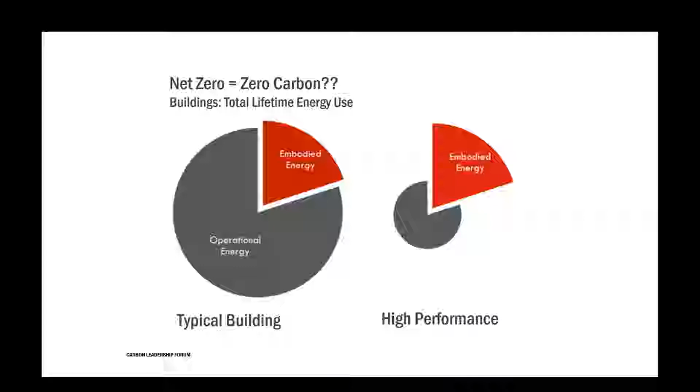Notably, if we're trying to meet this 2050 target, it's the emissions that happen now that are guaranteed to happen. So if we focus on reducing material emission impacts, we're making a guaranteed reduction in the immediate time frame.

In order to understand the environmental impact of material manufacturing and production, environmental life cycle assessment is used. This, sometimes called carbon accounting, tracks the quantities of material and energy consumed through the manufacturing, use, and end of life of a product or process.

So we are taking things from Earth, such as clean water or limestone, and then we are emitting things such as polluted water and greenhouse gases, or methane or nitrogen. So life cycle assessment is really an accounting method similar to cash accounting, but instead of tracking dollars, we're tracking emissions.

Much of material production is highly energy intensive, so the emissions can come from burning of natural gas or consuming of electricity for steel production, but it also can come from driving a diesel truck or a chemical reaction that takes place during cement production. So there is a wide range of emissions that happen throughout material manufacturing, and life cycle assessment is tracking those emissions.

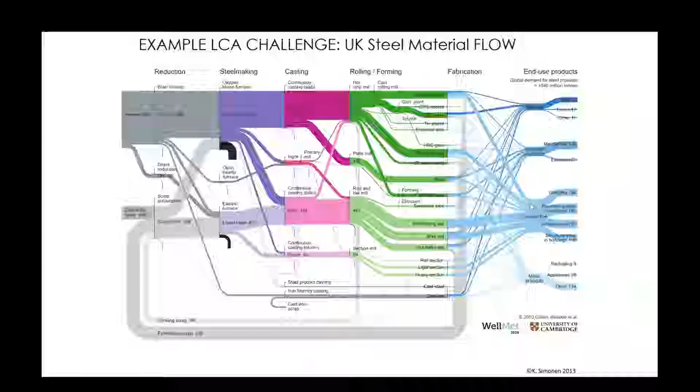As I mentioned, life cycle assessment follows a standardized method of tracking and reporting the environmental impact of a product. You can use that, for example, to find the carbon impact of producing flooring or the carbon impact of building a building.

And you could track that from cradle to gate, so from material extraction through manufacturing, or you can do it all the way from cradle to grave, so all the way till its disposal, or you could track it cradle to cradle, where we look to recycle and reuse and make the end of life product a material input to new products.

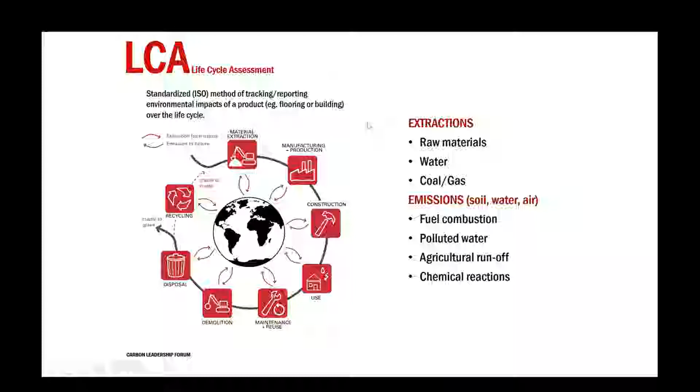Our work is focused particularly on the immediacy and global challenge of reducing carbon emissions. Life cycle assessment tracks other environmental impacts as well. These include eutrophication, or increasing nutrients to water bodies that can result in algae formations and killing off of a waterway, acidification of both water and soil, ozone formation or smog, and ozone depletion, which is the ozone hole.

Life cycle assessment tracks environmental impacts that are able to be measured well and correlated to emissions. Things not tracked by life cycle assessment include habitat disruption, the changing impacts of transforming land from a forest to subdivisions, for example. So it is not the only way of measuring environmental impact, but it is a way of measuring large-scale, broadly understood environmental impacts.

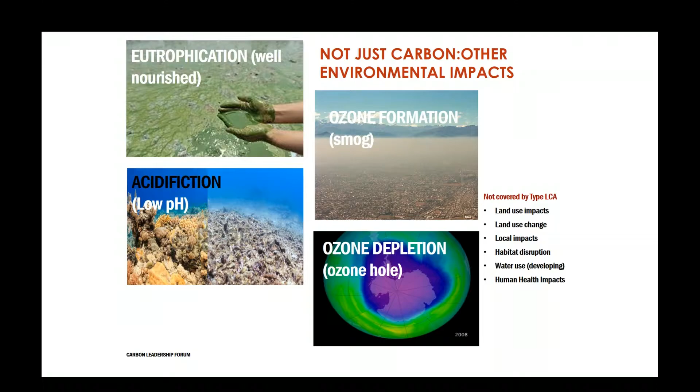Notably, the global efforts to track and reduce ozone depletion have been quite successful, with global collaboration enabling sort of turning the corner and healing the ozone hole. So through global cooperation about tracking and reducing ozone depletion emissions, we have made success there.

In the use of life cycle assessment data, the building industry usually does this in a fairly simplified manner, in which we're looking to track the quantities of a material used, for example, kilograms, and the estimate of the environmental impact of that steel production to get a total estimate.

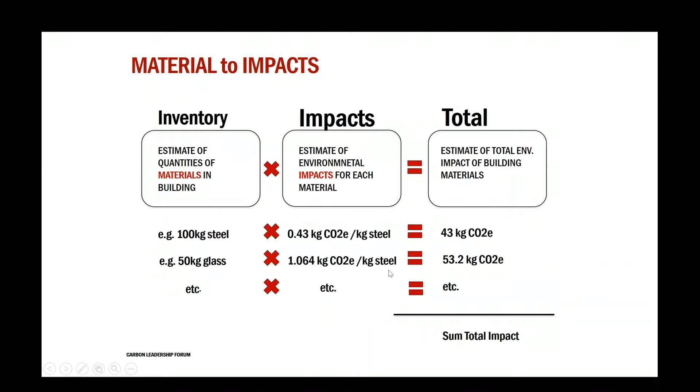So there are databases of environmental impacts of different building materials. There are also building materials that report their environmental impacts in a label, sort of like a nutrition label, called an environmental product declaration. So there's data around the environmental impacts of material, and we can understand the total impact of a building by multiplying it by the quantities of materials that are used.

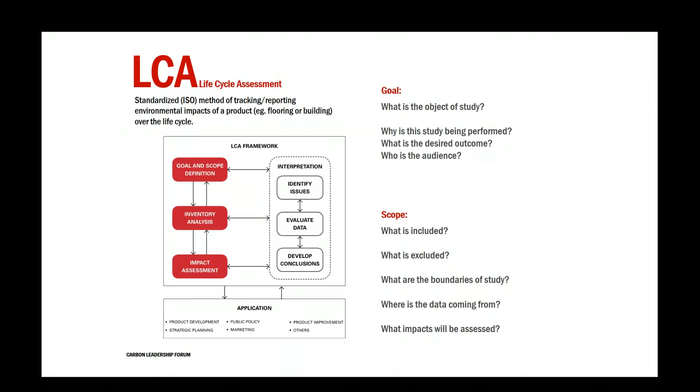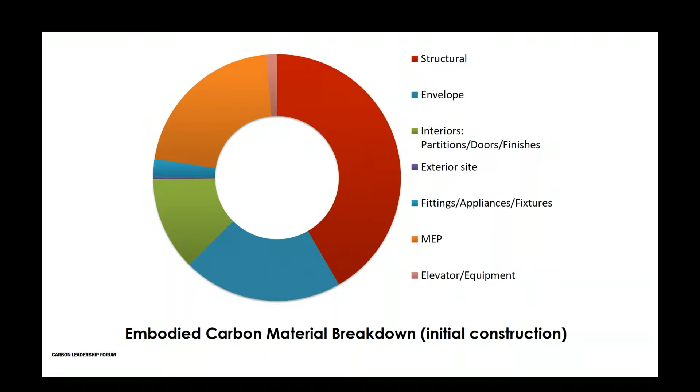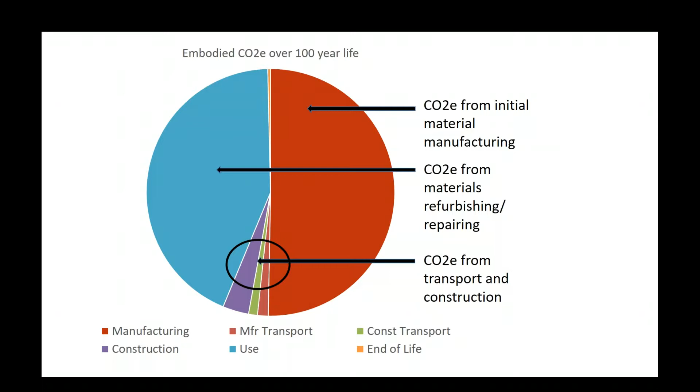There are multiple drivers within the building industry pushing to use life cycle assessment. Probably the most impactful has been LEED version 4, which gives points for reporting materials that have reported their life cycle impact with an environmental product declaration, and also gives points for demonstrating improvement using a whole building life cycle assessment.

Architecture 2030, a nonprofit, has issued a challenge for products, pushing product manufacturers to develop low carbon building products. This fits with a broader push within the building industry to increase transparency and understanding of the materials we're using, including health product declarations, declare labeling, and other certifications to confirm that sourcing of materials is done responsibly.

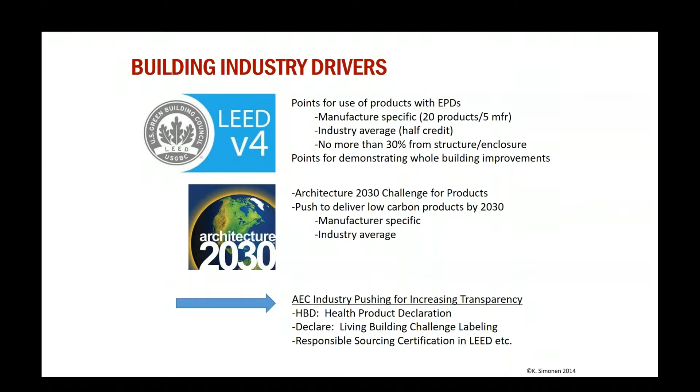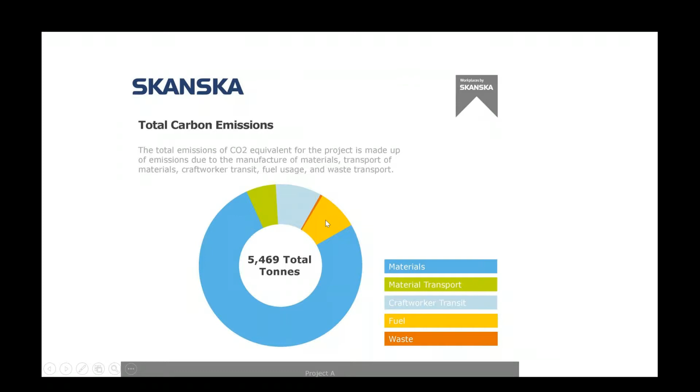I'll give a couple of examples of applying life cycle assessment in practice. The first is from Skanska Construction, which has been using life cycle assessment to evaluate the carbon emissions of different products and track the impacts of materials, material transportation, and craft worker transportation—looking at how much their employees are traveling and the fuel used on projects. They've developed a method to track different projects and understand where the opportunities for improvement are from a material and transportation perspective.

We did a research project here at the University of Washington trying to understand the order of magnitude of carbon impacts of construction. We compiled a database of multiple life cycle assessment studies of buildings and identified that buildings typically have less than about 1,000 kilograms of carbon dioxide equivalent per square meter, commonly between 200 and 500.

We are really at the beginning of using environmental life cycle assessment to track and reduce building material impacts. This is very similar to where we were about 10 years ago related to operational energy. We're hoping to help move the industry to understand high carbon versus low carbon building methods, and encourage movement toward the lower carbon ones.

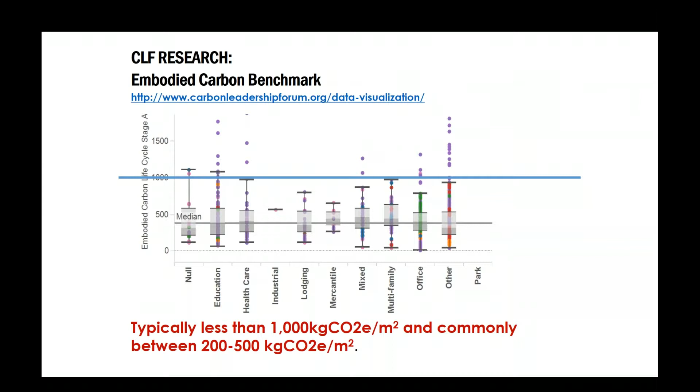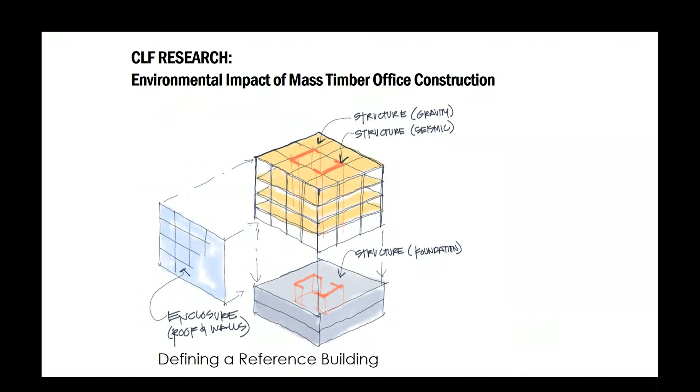This is a project that was funded by the U.S. Department of Agriculture to understand the environmental impact of the use of mass timber or heavy wood construction and taller office building construction. We built a life cycle assessment model of the structural system, the enclosure, the roof and the walls, and the structure of the foundation. Then we ran a parametric model, changing the column and grid beam spacing, testing out what are the optimum structural configurations for these buildings.

What we found is that the volume of the beam and slab, in cubic foot per square foot, can range by almost a factor of 2 depending on how you configure the building. So if we're looking to reduce the environmental impact of buildings, we're looking to both reduce the quantities of material we use and then reduce the environmental impact of those materials. This study was looking at trying to optimize the amount of material that is used.

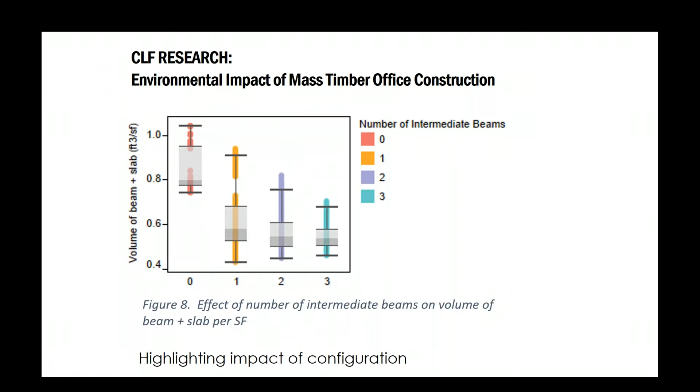Just this spring, we published an LCA practice guide. This is an introductory guide for life cycle assessment designed for building industry professionals. It has a general introduction, relatively short, that goes into a little bit more depth than what I talked about here. And then it has an implementation guide breaking down the process into 5 key steps, as well as providing online resources, links to tools, and other examples. It really is an entry-level document trying to understand how do buildings impact the environment, what are those emissions and how do they matter, et cetera.

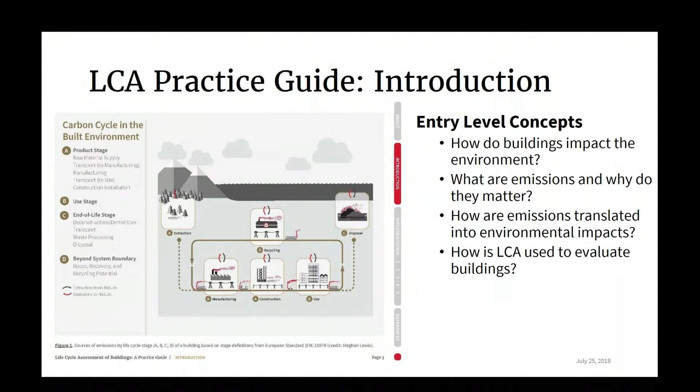So this is a fairly quick introduction to the use of life cycle assessments to understand the carbon impact of building materials. Again, I encourage you to visit our website, which has additional resources, or consider joining the Embodied Carbon Network. We are a global group of practitioners. It's an online discussion forum, so you can go there and ask questions and get answers, or just see what other people are talking about around this topic. Thank you very much.

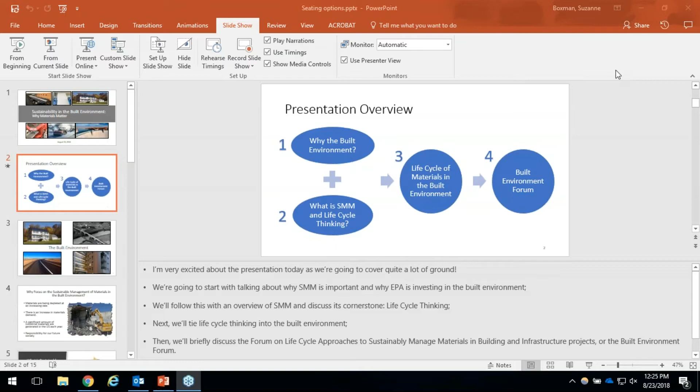Thank you, Kate, so much for your presentation on the Carbon Leadership Forum. As Kate explained in her presentation about life cycle assessment and the Carbon Leadership Forum, we recognize there's a critical need for life cycle thinking in the built environment. Life cycle assessments and life cycle thinking are key principles of our sustainable materials management program. So today, I'm going to introduce our Sustainable Materials Management, or SMM, program in the built environment, discuss some key life cycle thinking concepts, and conclude by describing the outcomes of a forum we had earlier this year, where we talked about life cycle approaches to sustainably manage materials in buildings and infrastructure projects.

For an overview of what I'm going to talk about: we'll start with why SMM is important and why EPA is investing in this area. We'll follow this with an overview of SMM and discuss its cornerstone of life cycle thinking. Then we'll tie these two concepts together, life cycle thinking and the built environment. Finally, I'll talk about our forum on life cycle approaches to sustainably manage materials in building and infrastructure projects, which I'll refer to as the Built Environment Forum for brevity. Then it sounds like I'll have time to answer a couple of questions.

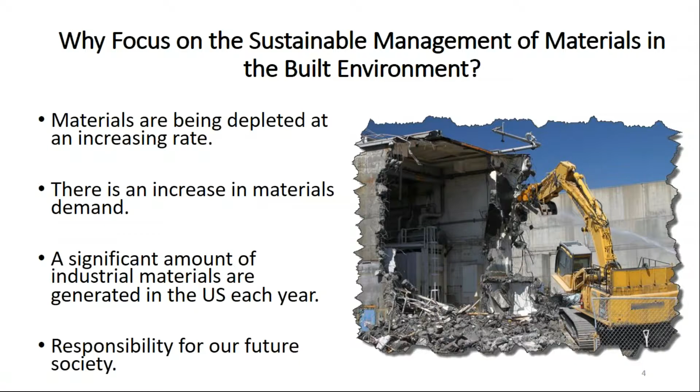Many opportunities exist for increasing the safe use of these resources. We have over 500 million tons of industrial materials generated in the U.S. We have 110 million residences in the U.S. We have natural disasters that are increasing the amount of debris generated, and really all of these present a lot of good opportunities. Because of all these different opportunities, we really need to come together to track and assess trends in the built environment. We each play a role in creating our future, and by coming together to work towards a better one, we'll be able to devise strategies for reducing the use of our raw materials, find efficiencies in our practices, and improve our bottom line.

With all of that line of thinking, that's where our sustainable materials management program comes in. Achieving all of the different growth that we need to do is just not possible with our current practices. There are different strategies for conserving natural resources, all informed by this concept of using natural resources in a sustainable manner while minimizing impacts on the environment and human health.

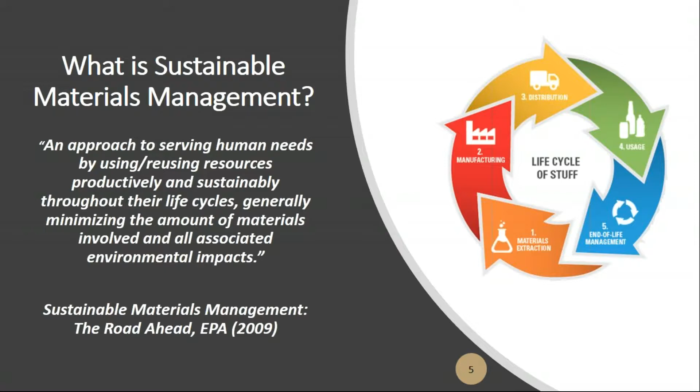There are a variety of different tools and approaches that engage life cycle thinking. We have life cycle assessment, or life cycle analysis, commonly referred to as LCA. This is a technique to make more informed decisions through a better understanding of human health and environmental impacts of products, processes, and activities. LCA can include evaluations of air, water, land, and energy of products, processes, or possible alternatives. You can think of it as an environmental footprint for a building or a material.

But this is really just one approach, and it can be pretty complex. It requires you to look at the bounds of your assessment and really take meticulous, detailed accounting of all the materials involved in that product or process. So EPA is actually working on an open source LCA tool to help bring everyone into the space. We're hoping in the near future a tool like this can help organizations understand where the biggest impacts are in their own value chain, and how to be better stewards of the resources and make the most effective use of those resources.

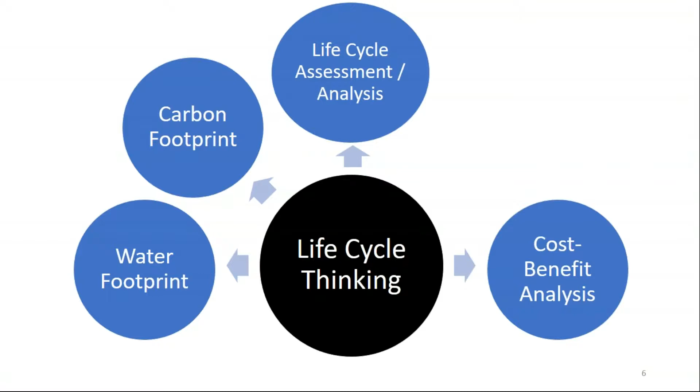And then there are some other tools. Cost benefit analysis, using that to make better decisions. We also have environmental product declarations, which can provide quantifiable environmental data to compare across products that fulfill a specific and similar function. But really, when all of these tools are used together, or used in contexts where they fit best, they can support sustainable materials management.

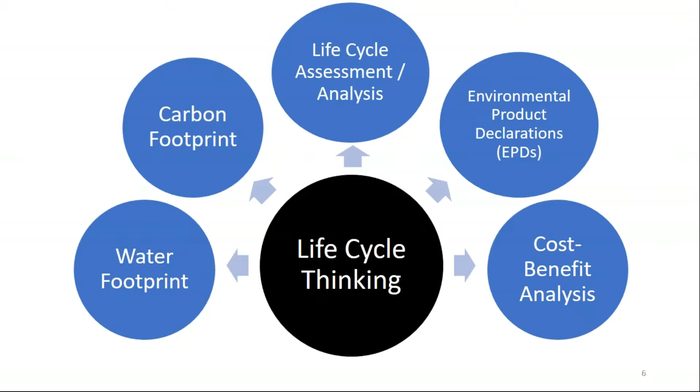So life cycle thinking, or life cycle based decision making, is critical to SMM, as I've been talking about. It can offer a greater return on investment by systematically and methodologically identifying opportunities in the materials life cycle.

Investing in areas where the most impact can be made, a similar return on investment can be had. Life cycle information helps the government set priorities and can help target program resources to where they may be most effective. The SMM and the built environment priority came from this sort of analysis using life cycle thinking.

Life cycle thinking can challenge preconceived ideas about appropriate targets and policies to mitigate environmental issues. And it helps us develop policies and programs that don't shift environmental burdens or create unintended consequences, which can often be a concern. And for us, really, one of the important things it does is it helps us identify the key partners and stakeholders for collaboration.

So in 2015, we released our strategic plan for fiscal years 2017 to 2022. And we identified 7 strategic areas in our strategic plan based on the Road Ahead report that I mentioned a little bit ago. The first 4 up here are the built environment, food, electronics, and packaging.

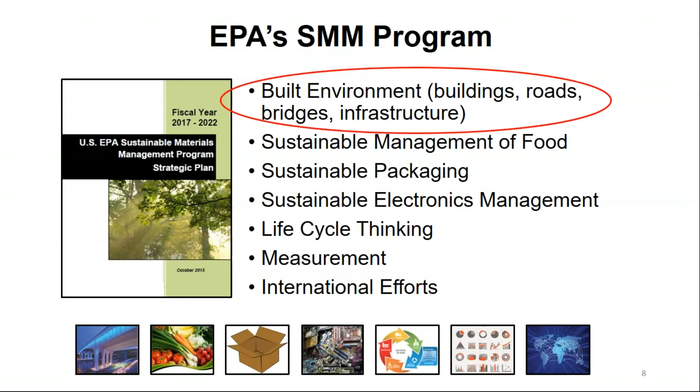So as we've been talking about life cycle thinking, it's a critical component to SMM, but to talk about that a little bit further, it's really going beyond the traditional focus on production and manufacturing processes to include social and economic impacts over the entire life cycle.

Some of the main goals for life cycle thinking are to reduce a product's resource and emissions to the environment, as well as improve its impact on society and economic performance throughout that product's life cycle.

So you already probably think like this. Many of you probably do. It's thinking with the life cycle involves thinking through a supply chain. And so this diagram is something that we worked on to really sort of identify...

...to have a good visual of that life cycle in the built environment. And I'm not going to kind of walk you through it because I want to be sensitive of time, but we really recognize that this is a good way of finding where all those collaboration points are, and that you can use this to identify professionals who can influence the future of our built environment.

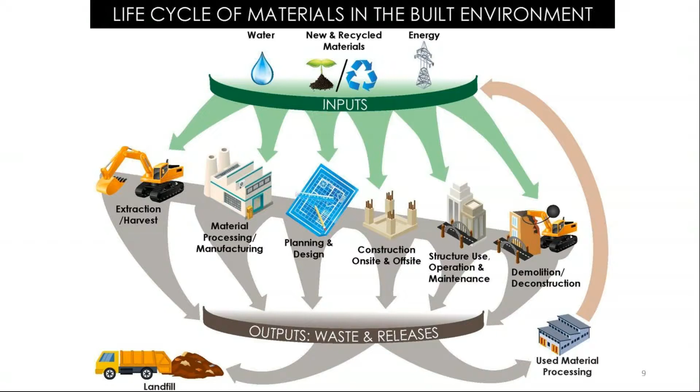So now I'm going to talk for a second about our forum on life cycle approaches to sustainably manage materials in building and infrastructure projects. So again, the Built Environment Forum.

And so we had this, it was January 30th to February 1st this year. And our goal was to bring people from across the life cycle of the built environment together to establish these unique connections and to identify solutions for improving resource efficiency, kind of with the focus on the built environment.

And that was really the main goal, and it was a successful event. We got a lot of positive feedback from many of the participants and some of the external stakeholders who contributed to helping us scope out the agenda for this and helped us with planning it.

I want to give a little shout out to the regional planning team who helped us put this together, and then the group of dedicated external stakeholders who really helped us make sure that we were putting together a dynamic agenda and could facilitate constructive conversations between all of the participants.

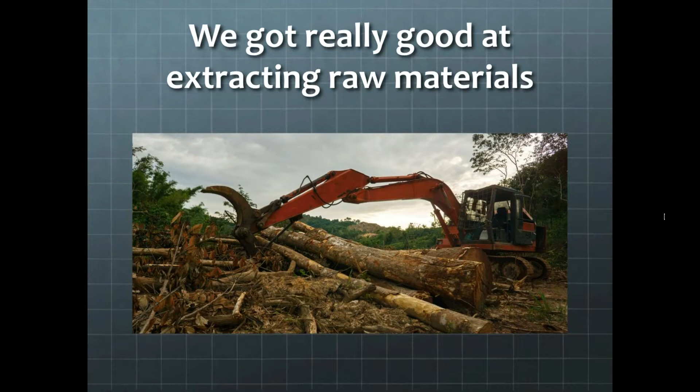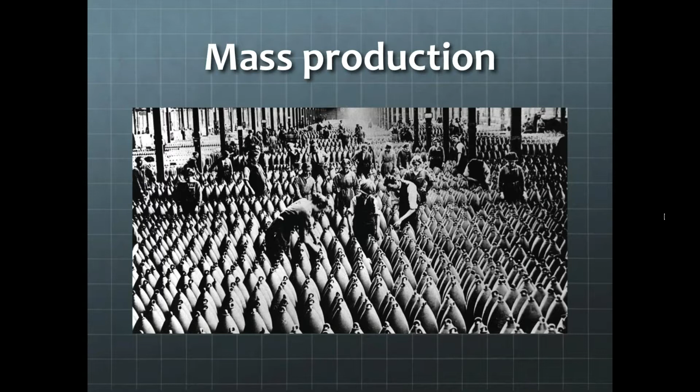Our systems are very good at doing this. We're very good at harvesting trees, very good at mass production. We got very good at mass production because of wars and prepping for wars. A lot of our systems—that's part of what I'm talking about today—is we created systems and economies that made it very easy for us to extract more raw materials very quickly and efficiently, move them into the mainstream.

And get them sold, and then because that system is built and it's very profitable, we keep doing that. And so we get more and more stuff. And that stuff is part of our built environment as well. And we've gotten in the habit of just throwing it away.

We've also had a lot of subsidies along the way. I like to talk about why a virgin 2x4 is cheaper than a reclaimed 2x4, even though that virgin 2x4 might have traveled across the country three times to get to a Home Depot. The reclaimed one that comes from across town is probably twice as expensive. But there's a whole infrastructure built into our system nationwide, worldwide, that allows for this movement of raw materials.

And we don't count the cost. Kate pointed out we're starting to count the carbon cost, but there's a lot of cost behind the shipment of that 2x4 that doesn't really get presented when you go to the hardware store or the lumber yard to buy that material. If we really did measure those true costs, it'd be a far different price and would point us back to reuse a lot quicker.

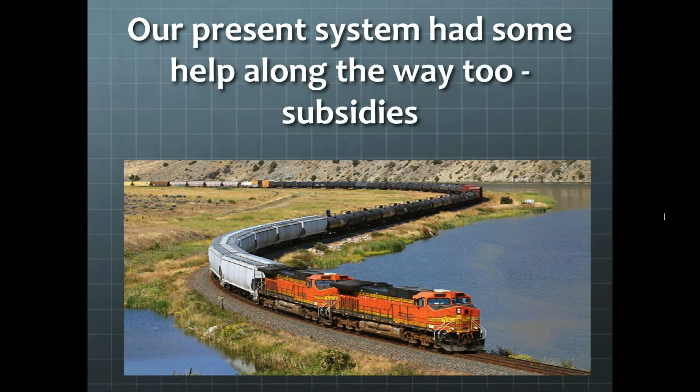And we also used to think the world was a lot bigger. I grew up outside of New York and New Jersey and used to see these barges going out to the ocean to dump. And we would go down to the Jersey Shore and see all of that garbage coming back up onto the shore. We now know the world is a whole lot smaller than we used to think it was.

So we have to think about building very differently. So the key question in my mind is, how do we utilize all of this new technology that we've gotten to get back to where we came from, to get back to that ancient system, the ancient systems of reuse.

To get back to when a building came down, nothing got wasted because the materials were good, long-lasting materials in the first place. A new home needed to be found for them because it was the most efficient and most effective way to build. We've gotten away from that. The challenge in my mind, the question in my mind here, is how do we utilize all of these amazing new technologies that we have developed to get back where we started?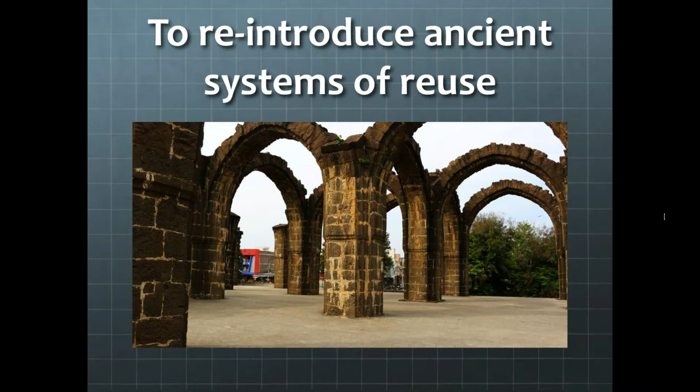And I think we can do it. There are four key elements in my mind to doing this. Deconstruction is one—we have to deconstruct. We have to start deconstructing a lot more of our present building stock. We have a huge built environment.

There was a quote earlier about it, it even blew my mind. But we have to start deconstructing these buildings instead of just crunching them up and throwing the materials away. One of the ways we can start doing this is to create tighter limits on waste in construction locally and regionally. Nationally, that's a big chunk, but it all needs to start local, I think. And those limits might be limits on the waste, limits on how things are built, on how things are diverted, things like that.

We don't have that within the reuse industry, and it's going to be a key element moving forward that we have to develop. The last thing is we need to design for reuse and deconstruction. The last 50 years in particular has made deconstruction much harder. When we talk about deconstructing a home from the 1920s, we're talking about materials that come apart fairly easily. Looking back to ancient times, you had stone, larger masses that came apart and could be reused easily. Now, with the introduction of adhesives, staples, and materials like that, it's very hard to pull elements of construction back apart. It makes it very hard to deconstruct and makes reuse very difficult. Things like contaminants such as lead and asbestos make it equally as hard. So designing how we build our buildings so they can be deconstructed and reused is a key element.

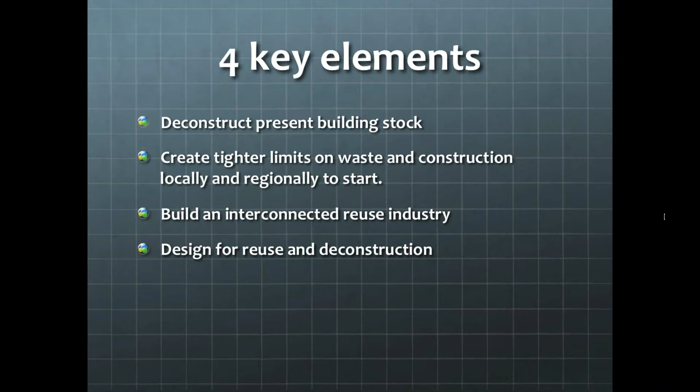A couple minutes here on who the reuse industry is and how we can encourage them. The reuse industry, broadly speaking, consists of deconstruction outfits, people that actually take buildings apart. This could be a single person with a small handheld crane taking a barn apart—I've seen that happen—all the way through to national organizations that deconstruct all over the country wherever needed.

We're also talking about retailers—reuse retailers. Those are the Habitat ReStores and other reuse organizations similar to those around the country that handle building materials. It's also all the way down to smaller salvage yards.

There's also reuse makers. These are the people that upcycle or upscale some of these materials. I know one in Pennsylvania that takes old flooring, old gymnasium floors, and as a workforce employment program, remills the flooring, repackages it, and sells it back out as flooring. A really nice upscaling project—there's tons more of them all over the country.

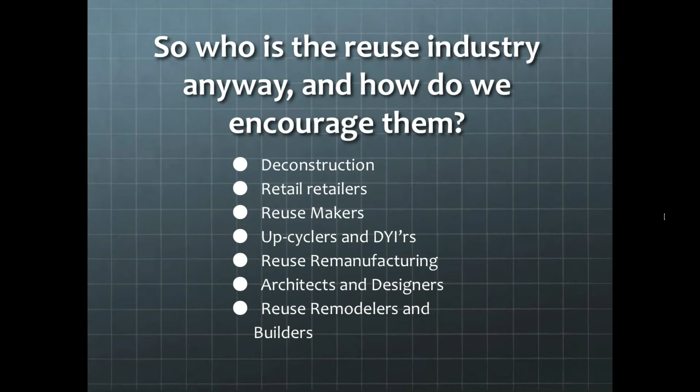And then there's reuse remodelers and builders. There's actually quite a bit going on with remodelers who use materials pulled out of homes to fashion them back into those homes or use them on other homes. This is, of course, not uncommon with remodelers where it's profitable—we all did it—but there's a new intention to it now, where people are doing it for the sake of the material itself and for salvaging. There's also builders building completely with salvaged materials. Not too many of those, but there are a few around.

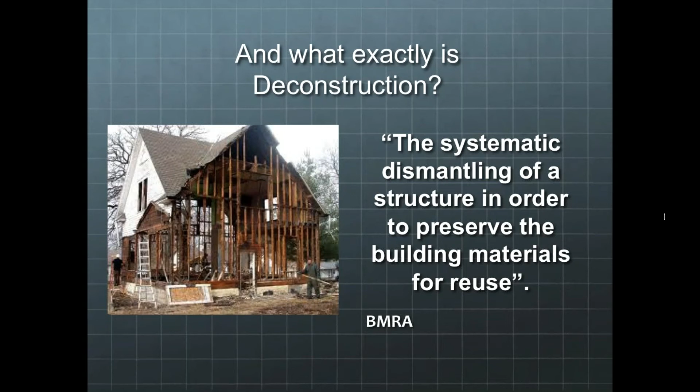So let me back up and say what exactly deconstruction is. We define it as the systematic dismantling of a structure in order to preserve the building materials for reuse. This can happen either partially, as in what we call a soft strip or a cherry pick, where some materials are hand-picked out, or it can happen like in this slide where the entire building is taken down piece by piece in reverse order, maximizing the materials salvaged through that process.

The other thing is how we move this material. We move it mostly through retail outlets—there are thousands nationwide, and there need to be thousands more. I say this because as more of us start looking at deconstruction as an option for salvaging materials and diverting waste, that material needs to go somewhere. We need to make sure we're not just hoarding it for future landfills. So any work we do within our communities or organizations, we have to make sure we're also supporting the growth of the reuse industries locally, or we will just be hoarding for landfill later.

Upcyclers and remakers, as I said, are a key part of our industry.

So is it all enough to turn the tide, these things we're presently doing? I don't think so. They're not really enough because right now reuse and deconstruction are still niche markets. We're very small, not integrated into the entire system of building our buildings nationwide.

We need to move to a large scale, starting with design, which goes back to the beginning. There need to be systematic approaches to large scale reuse and construction and distribution of materials. It goes back to the train, to the infrastructure. We need to keep building our infrastructure as an industry and as communities so we can take a building apart and move the materials onto new uses effectively.

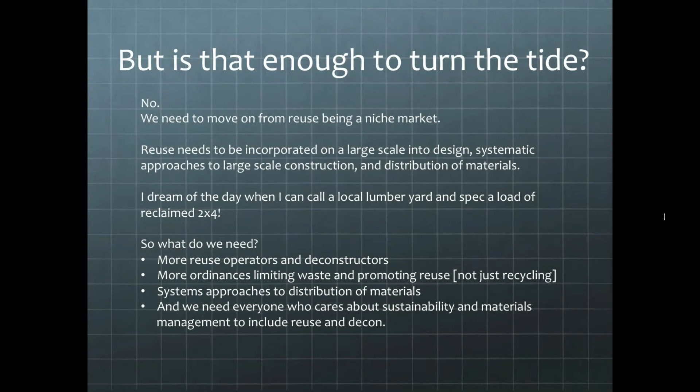So why is our industry so imperative? Why is deconstruction in particular so imperative here? And that is, like I said, a virgin 2x4 is still cheaper, and it's going to be for a while.

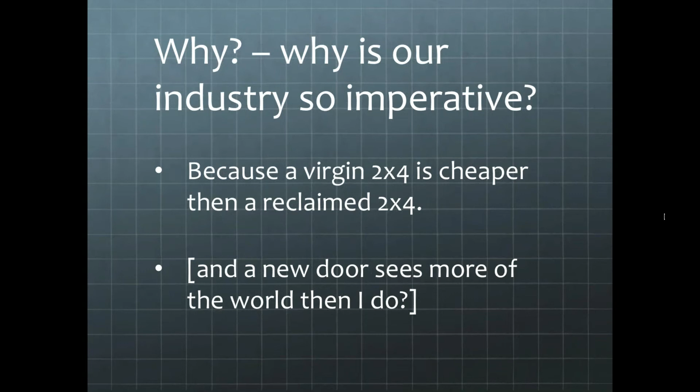I like to tell the story of a door that's created that might be from Georgia, the lumber from Georgia, and it gets shipped all over the country or all over the world, traveling to its final destination. It's not a viable and effective way to move our materials. We need to stay more local, and one of the ways we can do that is to reuse the materials on hand.

So here's a nice statistic. It's estimated that about 1 billion board feet of dimensional 2x4 and 2x6 are present in residential housing right now. I've also heard an estimate that up to 30% of that housing is likely to come down within the next 50 years, so that's a lot of material coming down. That's more than new construction can easily absorb. So we need new markets for it.

We need to be reusing this material, finding new ways to use it, whether that means putting it back into our housing. Oregon passed a building code change a year ago that allows for the use of reclaimed 2x4 and 2x6 materials within residential housing. It was semi-allowed before, but now it's built into the code in such a way that it can't be rejected by a building code official just because it's reused or reclaimed. It has to show similar problems to any new virgin lumber that would be used, such as rot, cracks, or splits.

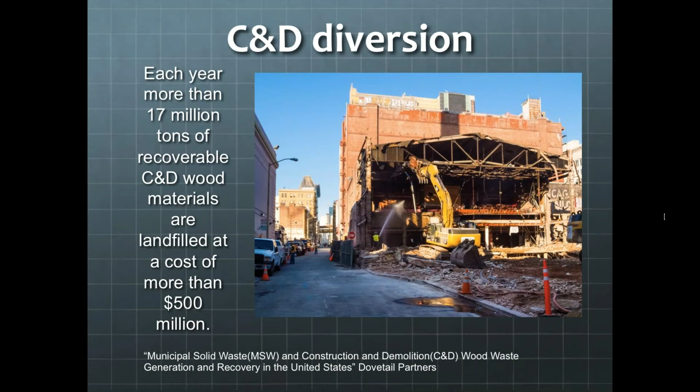So there's a lot of material in our present buildings that needs to be reused in creative ways. C&D diversion - this is an old statistic, but a lot of recoverable wood is still going into landfills.

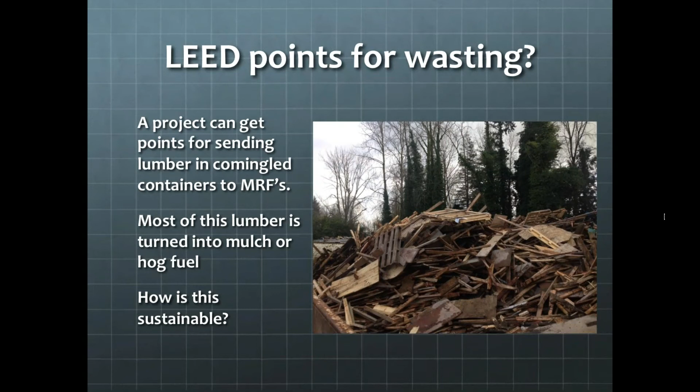Part of that - and I don't want to pick on LEED because they do incredible work, and I don't completely understand the points system - but from what I've heard, commingled lumber that goes into the waste stream and gets sent to hog fueling to be burned for energy can still get points. In my mind, that's a bit of a miss. We need to be giving credit for reusing lumber in its state as lumber, not downgrading it. That's kind of a recycle mentality - it's not what we need to be thinking about here.

Here's a little chart that Kate might find a little old news, but if you look at net positive and existing building reuse, most of the energy in a building that's existing and then gets reused is in its original construction, and then a little bit in the reuse of that building, as opposed to standard new construction or even zero net energy new construction, which uses more materials across the entire life cycle.

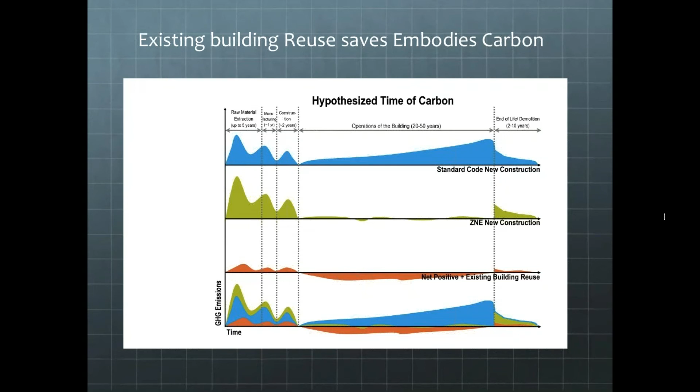So reusing the existing building is best. Reusing the materials from an existing building is definitely next in line. This is a very simple slide showing the global warming emissions of hardwood flooring and softwood framing - far less with reclaimed lumber. And again, you go back to that statistic with all of the 2x4 and 2x6 material in our present buildings, and this slide starts to really have some meaning to it.

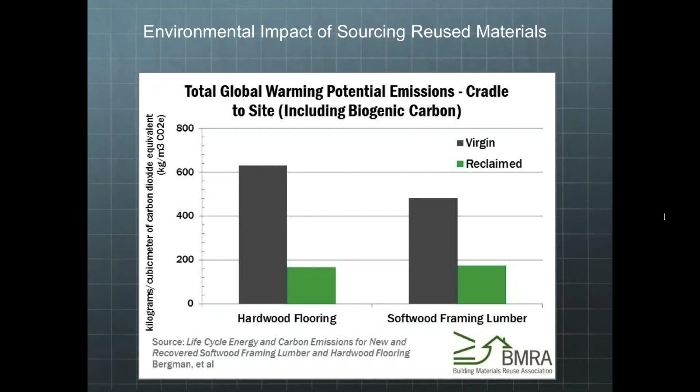The other jobs that we don't really have a measurement of and don't really even know how to estimate are the jobs created as those materials go from a deconstruction site down into reuse centers and DIYers and stuff. It's in the thousands, I'm sure. This is a great photo of some of my old staff at the Portland ReStore. We had 70 staff in our stores, all selling reclaimed materials, and that was just in Portland. We didn't do deconstruction, we just handled the materials after we got them. So there's a huge potential for job creation on a local scale with reuse and deconstruction.

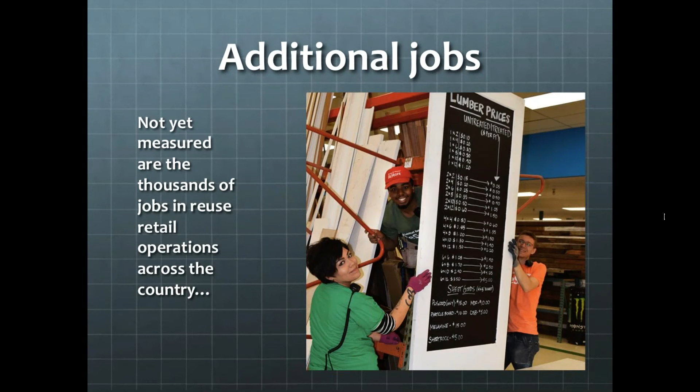So what's up in our industry now? The BMRA is talking with cities all across the country. There's more than I've even got listed here that want to support deconstruction and building material reuse by either some kind of legislation or ordinance or creative thinking around how they divert waste. If any of you represent cities that aren't on this list and would like to talk to me, please do.

What we're seeing across the country, why jurisdictions are looking at deconstruction as an option, there's several reasons. One, like in Portland and some of the other major cities on the West Coast, is infill and gentrification. So beautiful old homes, and sometimes not so beautiful, but older homes are being torn down to make way for larger homes or multiplexes, other office buildings, infill.

The other reason a lot of jurisdictions are looking at this is urban blight and abandoned neighborhoods. Cities like Detroit, Baltimore, Pittsburgh, Washington D.C., Atlanta have huge amounts of abandoned homes that are slated for tearing down. Far better to take those buildings down through deconstruction, create the jobs, save the material, and keep the stuff out of the landfill.

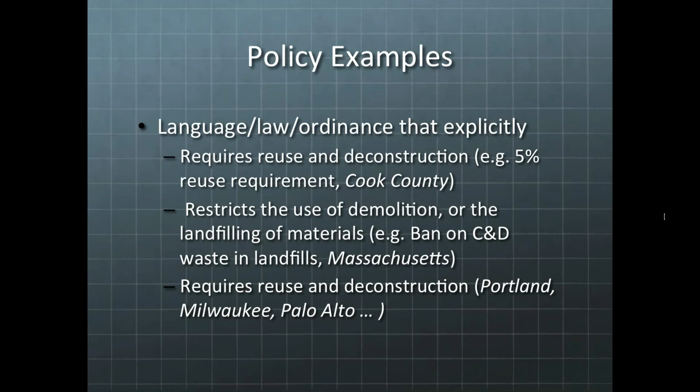The one caution I'd say there is that if you're looking at that as an option, make sure that you invest in the infrastructure to make it successful. We talk with some folks who say, yeah, we want to do deconstruction, we want to pass this ordinance, we want to make this happen, but they don't have the underlying systems that will make it successful. So you really want to be careful there if you're looking in that direction.

On the horizon, we see research happening for dimensional lumber in mainstream, including building office buildings, increase in government agencies contacting us and looking at this, and an increased awareness in the difference between recycle and reuse. People have used the terms interchangeably for years. We've got to separate those terms out, clarify our language, and start using the right language when we're thinking about our built environment, because that's really going to help.

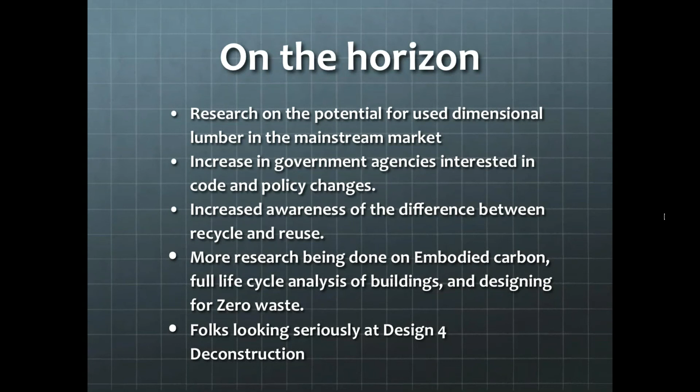And looking at design for deconstruction is really going to move us forward a lot. I'm out of time, so our challenges are we lack serious investment. We are a scattered group that lacks high organization, and we're pretty much word of mouth. So we're still a small industry, even though we're national, international.

We need to grow. That goes back to a lot of what I pointed out about growing our infrastructure, supporting our systems, creating our systems, supporting people that are doing this work.

I love Woodsy. I grew up with Woodsy, and I think our future is with this next generation. They're paying attention. I mentioned a third of the people at our conference next month are architects or designers. Most of them are recent graduates from architecture school. These are the ones that we need to invest in and give them the best tools that we can.